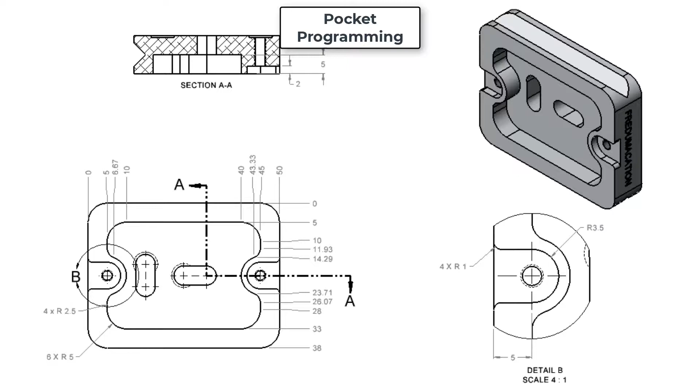In this video, I'll demonstrate how to complete the roughing of the pocket after the 12mm end mill has finished its helical entry. First, I'll rough as much material as possible with the 12mm end mill while maintaining a minimum of 2.5mm for the finishing tool.

Then I'll select a new tool which can clean up the remaining areas of the pocket where this end mill could not fit. After the helical entry of the cutting tool, the areas shown in red represent the remaining material to be removed with the roughing tools. The area shown in blue represents the 2.5mm which will be left for the finishing tool to remove.

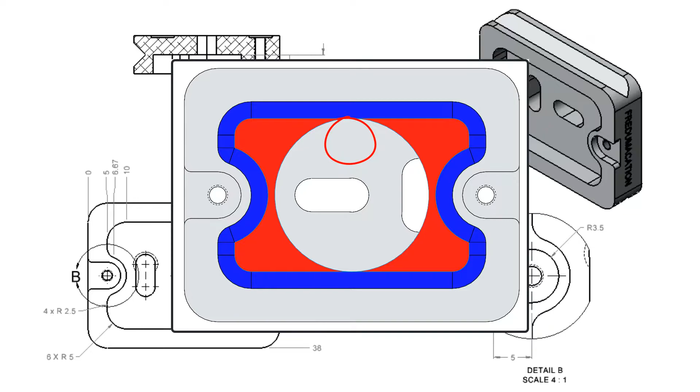At the end of the helical entry, the tool will be here, so I'll start cutting the remaining roughing from this location. After this 12mm end mill has finished roughing, the area shown in black will remain for the next roughing tool to remove. The tool could be programmed to remove slightly more material in each corner as shown here,

but it will take more time than it is worth to calculate the tangent points. Instead, the center of the tool will be programmed so that the cutter removes the rectangular shape as shown.

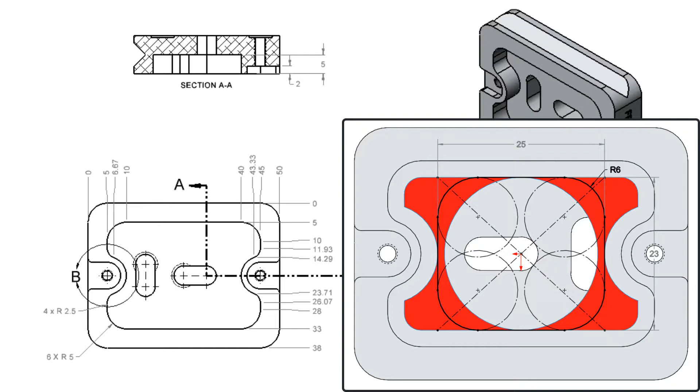After the helical entry is completed, I'll program the cutter to move to X 18.5, then Y minus 24.5, then X 31.5, then Y minus 13.5, and lastly to X 24.

This will see the starting position overlapped by 1mm, and next I'll rapid the cutter out of the pocket and send it to the tool change position.

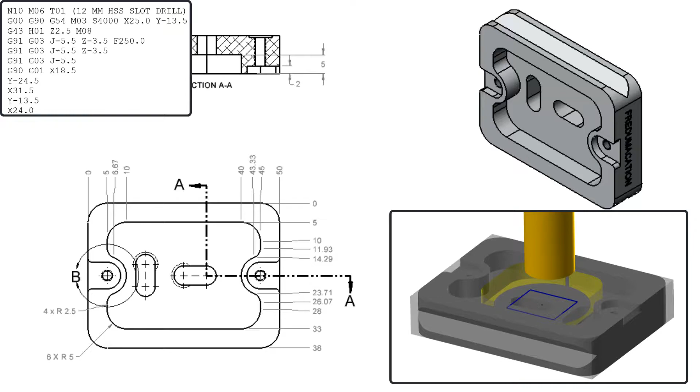I won't bother arcing off because I'm not worried about a witness mark as there's still 2.5mm to be removed from the pocket wall. Now I'll need to select a new tool to clean up the areas as shown in black.

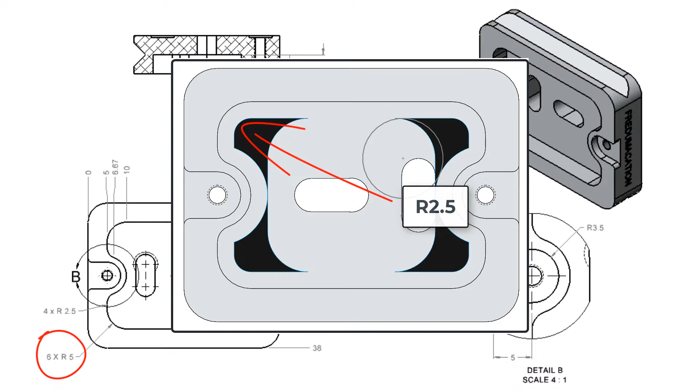First I'll need to determine the maximum cutter diameter, which will be 5mm. Since the 5mm part radius is being offset 2.5mm towards the center of the pocket, the radius as shown here will be 2.5mm, thereby limiting my cutter diameter to 5.

In each of the four corners there will be a very small amount of material this cutter will not be capable of removing, as shown by the red area. However, since it is so small, I will not worry about it. The finishing tool will clean this up.

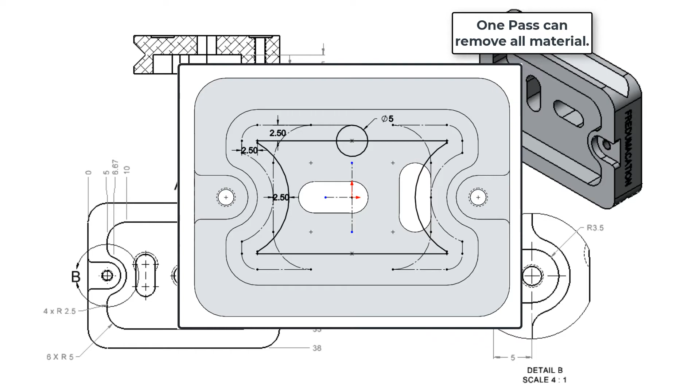To complete the roughing, one pass following the profile as shown here will clean up all of the material. However, this will use up to 100% of the cutter diameter, which may break the cutter if the feed is just a bit too aggressive.

So I'll remove this material with two 1.25mm passes taken at 4.5mm depth. I'll start the 5mm end mill on the center of the part in the x-axis so it can be fed down into the pocket and not engage any material, and at y minus 11.25.

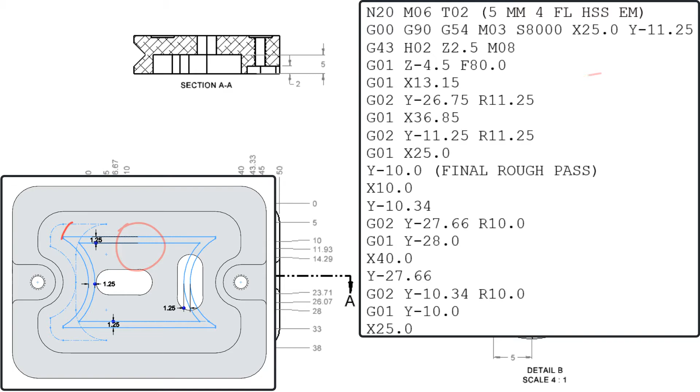Then I'll feed the tool counterclockwise around the pocket. The next x coordinate will be x 13.15, the start of the arc. To calculate the x and y coordinates for the arc, the Pythagorean theorem will need to be used.

The radius of the arc is 11.25mm, and the change in the y-axis from the center to the start of the arc is 7.75mm. This makes the y-coordinate at the end of the arc negative 26.75. The change in the x-axis for this triangle is 8.15mm, making the x-coordinate 13.15.

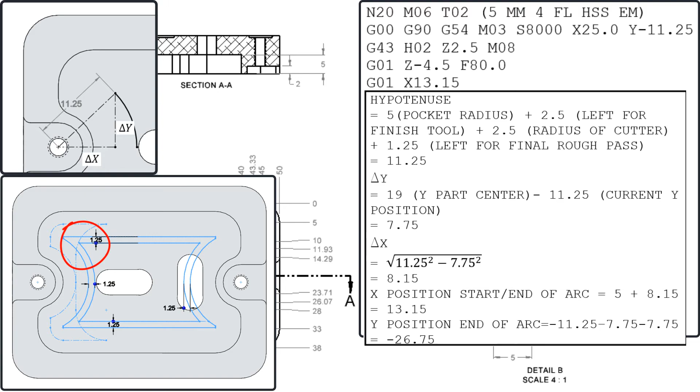Since the part is symmetrical about its center, the remaining coordinates are easily calculated for the rest of this roughing pass. Once the first rough pass is complete, the tool can now be repositioned in the y-axis to take the final rough cut.

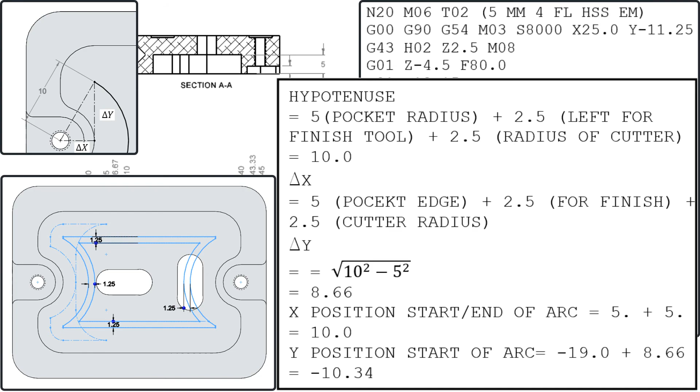Again, the Pythagorean theorem will be used to calculate the x and y coordinates of the arc. Once these are known, the final rough pass can then be programmed as shown here.

These tool paths will also work to finish the pocket if the ramp entry was used. In the next video, I'll demonstrate how to program the finished cutting of this pocket.